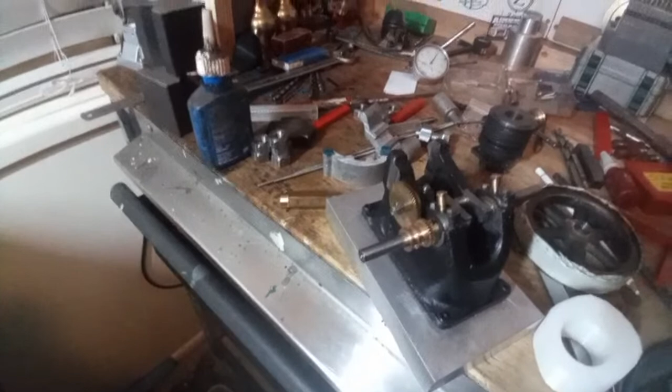Home, polished the balancing arbor for the grinder for half hour or something after I got home. I just finished messing with that.

Joe's out on the kitchen table trying to balance the grinding wheel. That way lies madness, so I leave him to it. That's what I believe anyway.

Brendan, g'day. Bill's drunk. Well, Bill's had some whiskey. I don't know if he's drunk. I don't know if he gets drunk. I've never seen him drunk.

So, had a bit of a weekend, I guess. I don't know if it was a good weekend or a bad weekend or a productive weekend or a non-productive weekend or any other sort of weekend, but we had a weekend. What have we done?

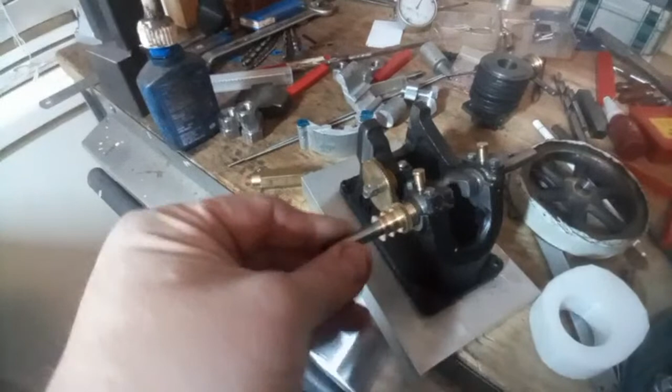This engine, we've actually swapped out the main bearings again because they developed issues. Not sure why that was. Something wasn't sitting in properly or something, and I took a fraction too much out of them, and then all of a sudden they were very loose.

So this feels pretty good here. Pretty happy with that, actually. Really feels good, and they're reasonably free. There's no play in there.

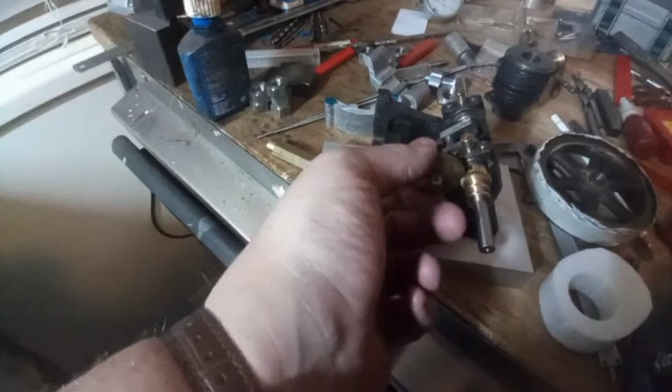It's pretty loose actually, it's not real good. So this needs a pressed in bush to fit on this pin at some point.

I also fixed this gear, which it's got an outside piece on the gear that's silver soldered on, and then three screws in it, so we've done that 120 degrees apart. Got that done.

I think also tap this set screw to hold this pin in place. It's something else I did yesterday, I think I did that. So that's where we're going with that.

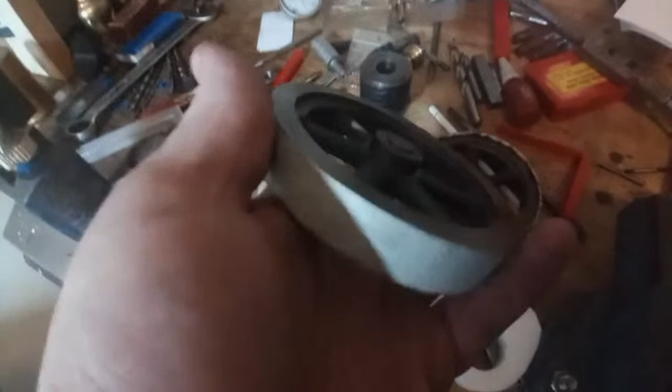I've actually bored the crankshaft out, I've bored the flywheels out. This one has had a new reasonable fit bush Loctited in properly, so that's not coming out, I don't think. And we can set that up and bore it and get it nice and fitted to the actual on here. The other one hasn't got that fitted yet, but I've only got a bit of rough old cast iron flat, or some offcuts that look honestly something like this, which I cut a bit out of and machined up.

Hey David, travelling through Croatia. Keep safe over there. Don't get mixed up in any minor wars or anything.

So this one's ready to set up properly and bore out. I'll probably face it first. It's very easy to face it square and flat. And then we'll set it up accurately and bore them to fit here.

Got a broach to put keyways in them. And then, I was at my mate John's. Oh gosh, I don't know where that went. Oh, it's over here. Here we go.

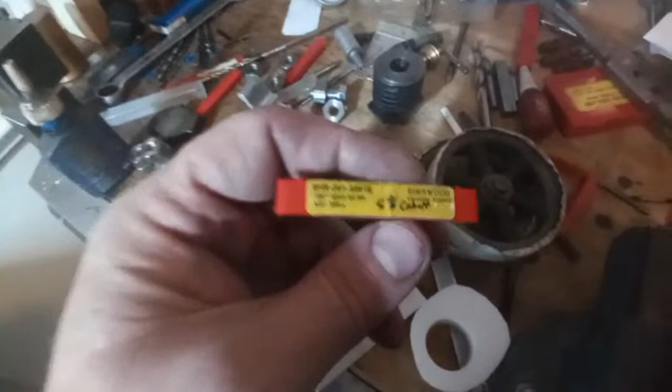It's at my mate John's on the weekend too, and he loaned me a 3/32 end mill, which isn't very big, to put keyways in here. So that'll be a fun job, I can't wait to do.

So this is looking all right. Get some flywheels on so it's balanced. It should run pretty reasonable, I think. So that's still a work in progress, of course, but we're making a little bit of inroad, I think. Here we go.

The cam's a bit of an interesting thing. I might go over here to the drawing, if we can actually get to the drawing.

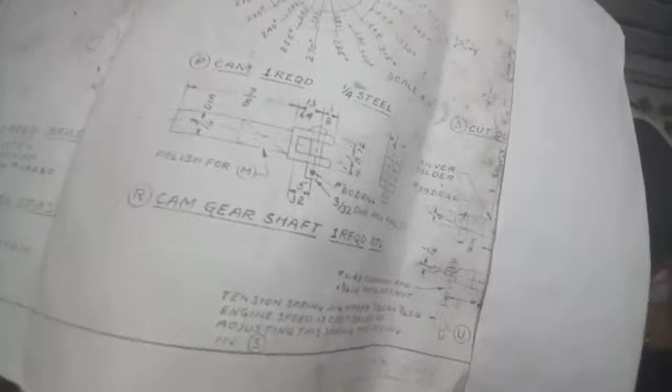Put this drawing away last night. This is the cam, right? And this is how it's laid out in 15-degree increments.

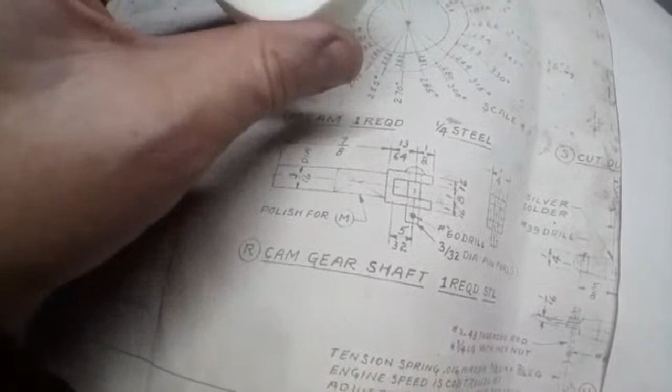Around the circumference it's 4 times or something, I think it must be about 4 to 1. I actually 3D printed it and it fits the drawing, sort of. Almost. Yeah, sort of fits the drawing.

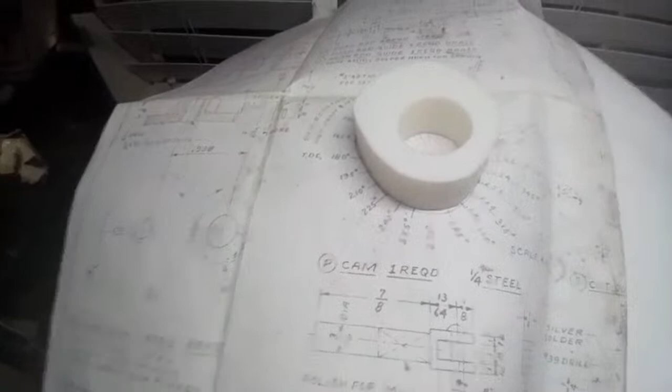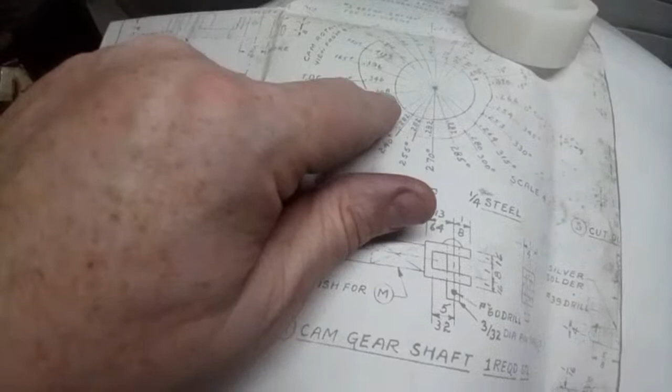So if I was going to do it manually, it's a very difficult thing, because not only is it laid out with a diameter at each increment, so at 195 degrees it's 308 thou diameter radius, and at 150 it's 412 thou radius, etc, etc, if that makes any sense.

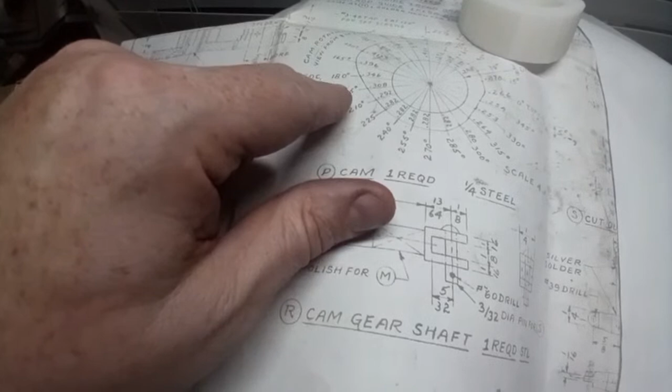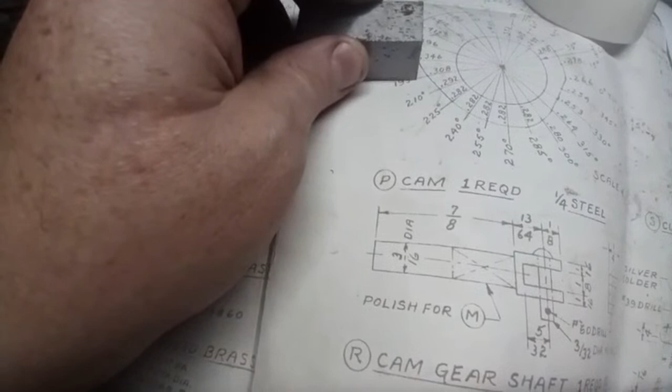You can't just set it and machine it at that and go around it and keep doing that. Because what happens - if there's a bit of material we could use, say this is the end of the cutter - if it's at 90 degrees to the centre, what you find is that it's going to cut into the side of the cam there like that. So it's not going to actually be anything like what it's supposed to look like.

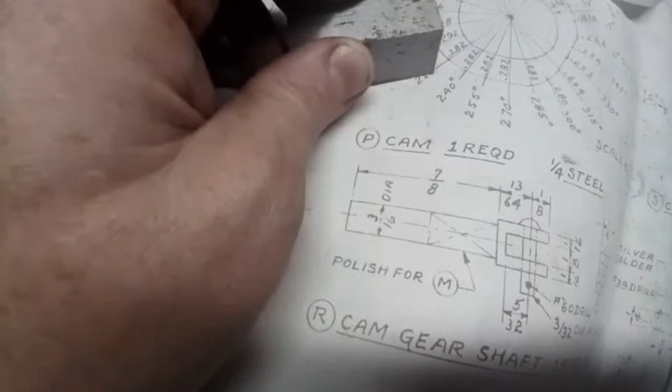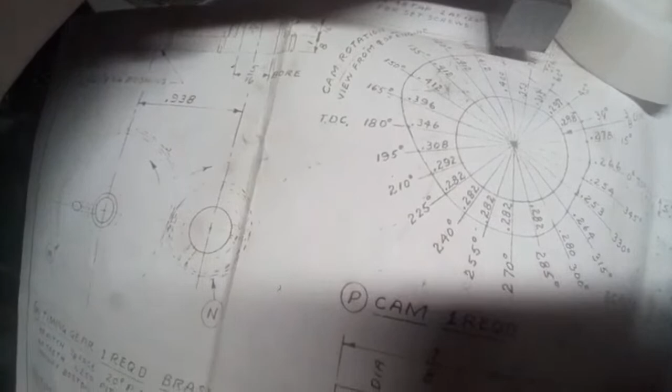If you just cut it on centre, that works too, but there's quite a bit to take off, quite a bit to file off if you do it that way. If you can imagine what's left, it only works to there because when you get round to here, it does exactly the same thing again, and you've got to do it from the other side and come round from the starting position.

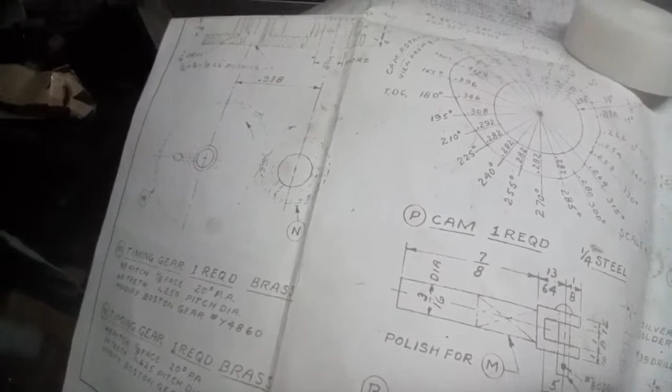Paul says it sounds like a shaper job. Yes, it does sound like a shaper job, and that's a very astute thought process. To me it sounds like a CNC machine job, but anyway, we'll see how that goes.

Anyway, there's no real easy way to do this, and the way I've set this out is just with a square - see that? Find something with a bit of contrast so you can see it. Just square corners, or the lines between the two angle points. You have a line between that point and that point, and a line between that point there and that point there.

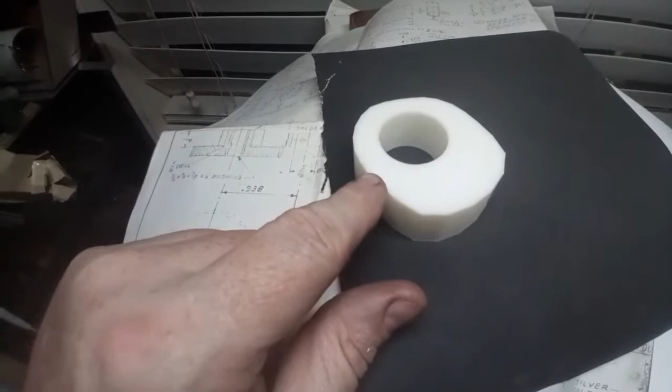So the smart way to do it, of course, is to draw it out and put a spline around it so that it's all curved, and then just run around it with an end mill.

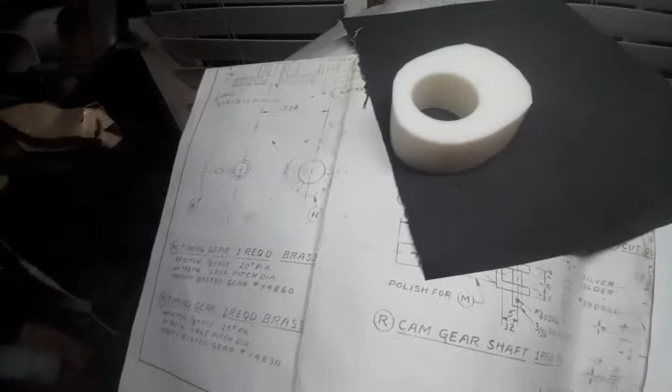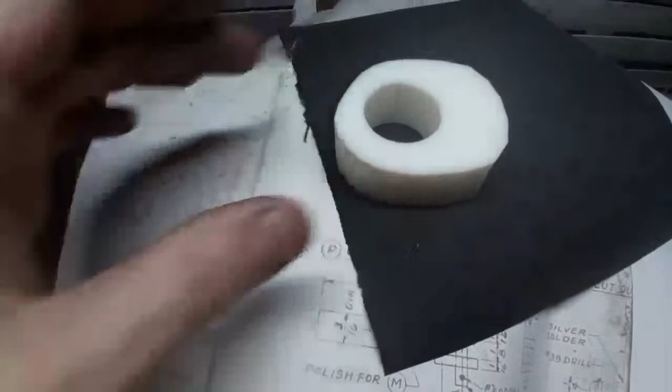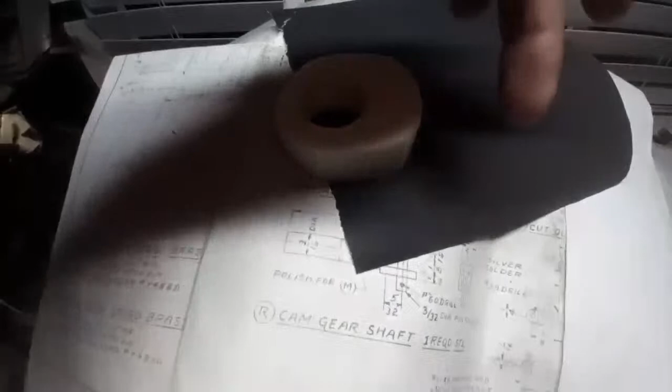Don't know anyone with a CNC grinder, that's the problem, if there's even such a thing. But it'd be very nice to have a follower, honestly. Boring bar in the mill with an offset - so you machine this around here, and offset it. You'd have a boring bar that was big enough to cover the whole lot, and then offset it to fit around here.

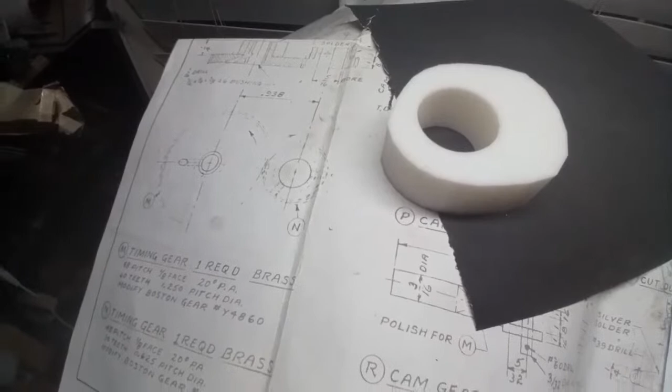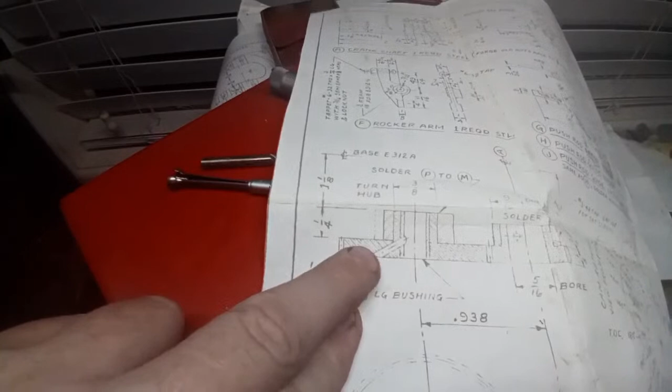Anyway, we're just going to mill it on a bit of bar, probably out of something that can be case hardened, and then case harden it and solder it on the cam. So it actually fits on the cam gear, which is here, fits over the top there, in between the gear and the body.

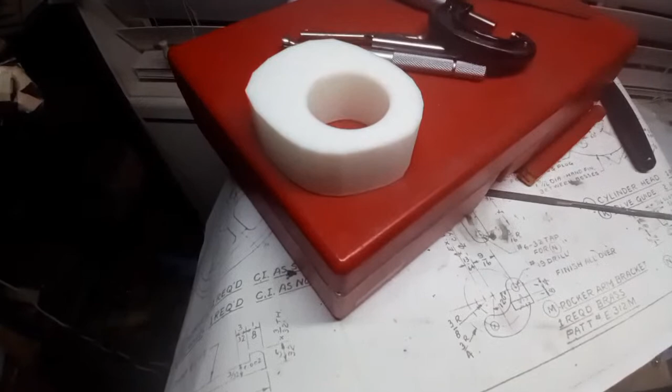This place feels a bit lived in tonight because I've had a big weekend in here. In other work,

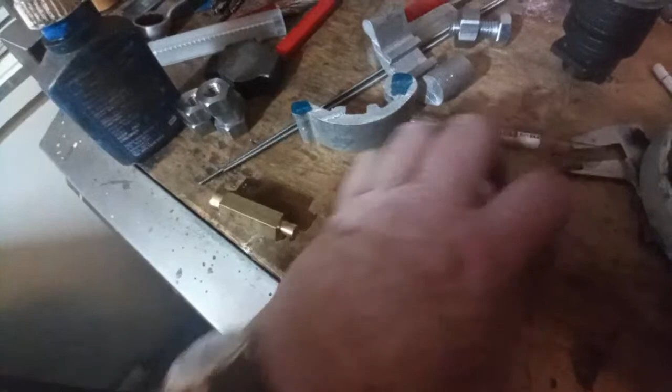these are all I managed to make, but these are 1/2 inch Whitworth BS 190, British Standard 190, 1/2 inch Whitworth full nuts, and half nuts for lock nuts.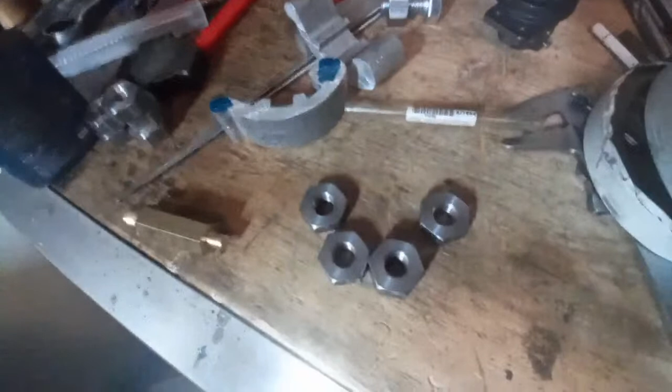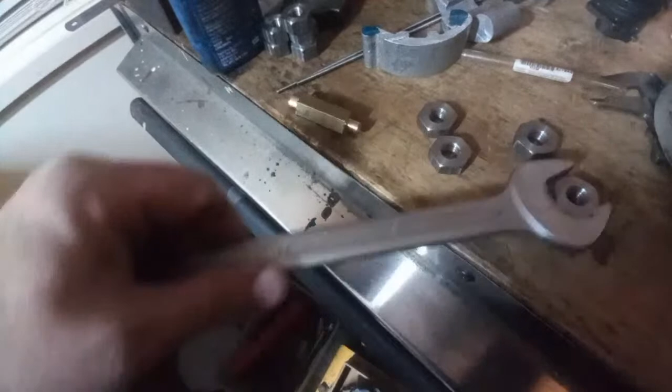So these are 4 nuts that we need for the roller ASAP, so these are going on next weekend. But it fits the spanner, which there's no point actually doing them if they don't fit the spanner. This is a 5/8 Whitworth, or 1/2 inch Whitworth spanner. Yeah, 1/2 inch Whitworth.

And if you look at it, the spanners, actually the ring spanners, the correct height for the nut, uses all the nut. And the open-ended spanner is the correct width for the lock nut or the half nut. So obviously someone's thought about that at some point. Bit exciting, interesting, I guess.

These are a bit of a pain because they're 915 to 920, I think is the tolerance on these, thousandths of an inch across the flats. There must be another one there, it's on the bolt.

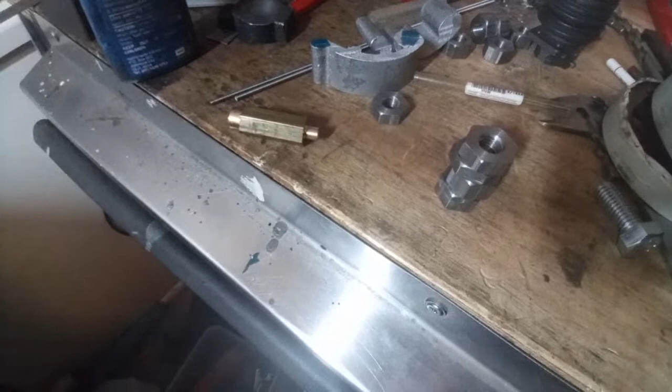So you just got to get in and make them. It's not really the end of the world, but there's some - probably will, but they're not available. What happened was that just before the Second World War, inadvertently people refer to this system here, this British standard, as being pre-war. It sort of works, but it's not really. I believe the standard was changed in the...

It was changed at the beginning of the war anyway, to save material, and all of a sudden a 1/2 inch nut was the same size as a 7/16 inch nut, which is today's standard. You see, this is the same size as a modern 1/2 inch bolt. So Whitworth's become one size smaller, and the big size is no longer available anywhere, like impossible to find.

So you've got to make them. I'll get someone to make them. Probably do them myself.

He's actually getting some sort of a production stream worked out to make these, as many as we need. These we need a lot of because there's probably 30 of them on that little Beyer Peacock engine, and there's probably another 30 of them on the roller in various places, probably more. The 7/16 ones we might need somewhere, I don't know where. 5/8 ones we need a lot of. So there we go.

If we have a look over here, I'm just going to clear some space off this bench because I've got tools here everywhere.

A set of gauge pins, which are a very useful thing if you're drilling, if you're making small bores. I think if you're boring small bores, these are about the most useful thing you could possibly own. Much better than any internal micrometer of any sort. Get a set of these up to 12mm or half inch or whatever, and then you can be pretty jolly accurate with your bore and tell exactly what size it is and how much bigger you need to go. So there's my tip for tonight.

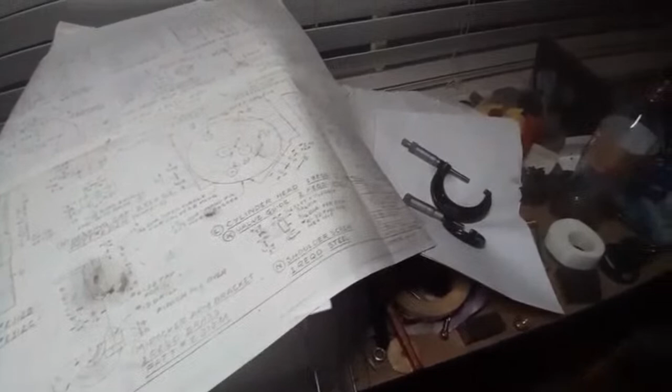Some more drawings, cylinder head and crankcase, etc. We're up to here. What was I going to show you? Yeah, I know what I was going to show you.

There we go. Machinery's Handbook, because everyone needs a copy of this. This is the 11th edition. Don't know what year it is - 1943. A reference book: Machine design and shop practice for the mechanical engineer, draftsman, toolmaker and machinist, by Jones and Oberg.

Anyway, this is courtesy Keith Fenner, and I really appreciate this because the occasional use it gets sort of makes it worth its weight in gold.

But let's look here, the chart on page 1213: nuts and bolts and machine details. It's got British Standard Whitworth, BSW hex, bolts, set screws, nuts and washers, and it's got all the diameters for the washers and bolts and nuts and everything else. Then it's got American Standard stuff, and it's got stuff like castellated nuts and square nuts and bolt heads and square bolts and all that stuff that you could not possibly do without, really.

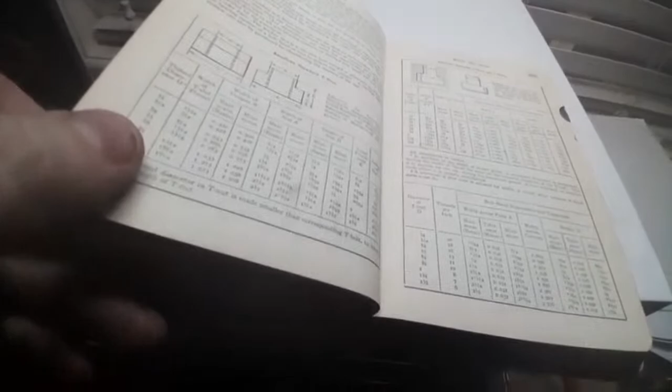Spacing of bolts for wrench clearance, which if anyone's ever done anything with English cars, they know that was not actually something that anyone ever looked at or pretended there was actually a thing. It's completely and utter fiction.

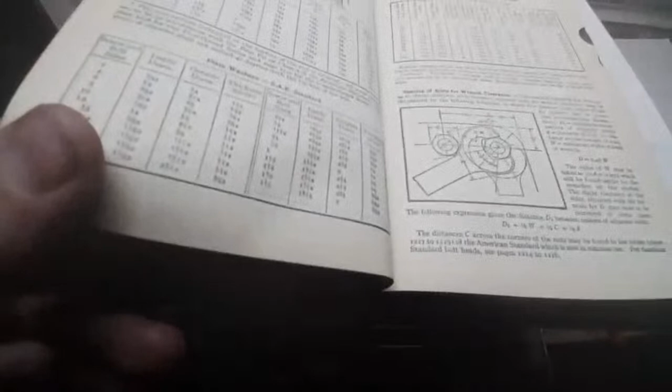But spacing for nuts on machines, castellated nuts, dome nuts, machine screws, cap screws, set screws, hand wheels and stuff going on from there, flywheels and nails and spikes and so forth. But that's all the information. So, very useful, that's the chart. If all else fails, you don't know where anything is, have a look in Machinery's Handbook, because it's probably there. You just got to find it.

So this still is pretty standard Whitworth chart. It's still the old BS 190, not the new standard, the post-war standard, so it's fairly useful. It's got a note down the bottom that says the British Standards Institution recommends that sizes marked with asterisks be dispensed with for general use. So inch and 3/8, inch and 5/8, and 11/16 Whitworth, the sizes that you probably don't see very often, because it says in the book.

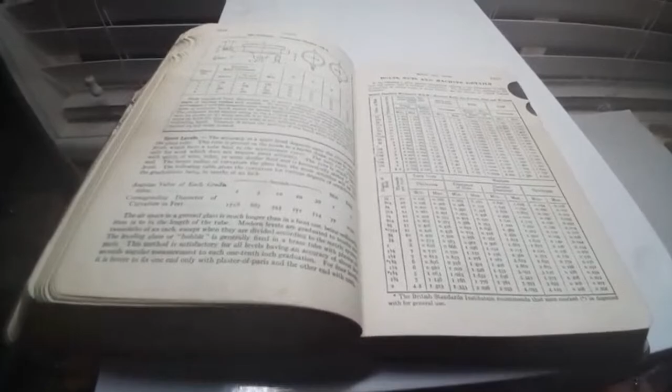But yeah, crop circles in the Machinery's Handbook, and they ignored most of that probably. So there we go, it's a treat from Machinery's Handbook, 1940 something - 1943. It's pre-wartime, is it? 1943, wartime.

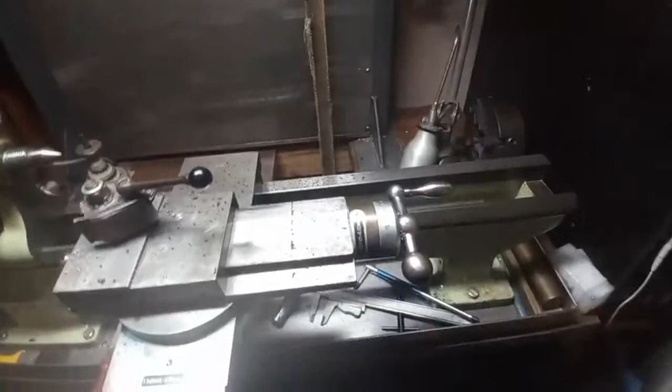Anyway, so that was done. The lathe was sort of clean for a minute last night after I sort of finished those nuts and before I started the flywheels, but that didn't last particularly long.

This place feels a bit dark in here and I apologise for that. What's everyone else up to? What other exciting things? There's a new video from Bill, saw that. There's a new one from Rustnox, which is on my list of things to see, and I meant to watch it before tonight, but I got busy when I came home with other things. Apologies. Don't know what else I saw.

I don't know if I've got much else to add. There's what I'm going to call a maintenance day, but it's really just messing around on the roller day on Saturday and Sunday this weekend. I've got the weekend off and I'm going down to spend some time fitting some bits like this and changing them over.

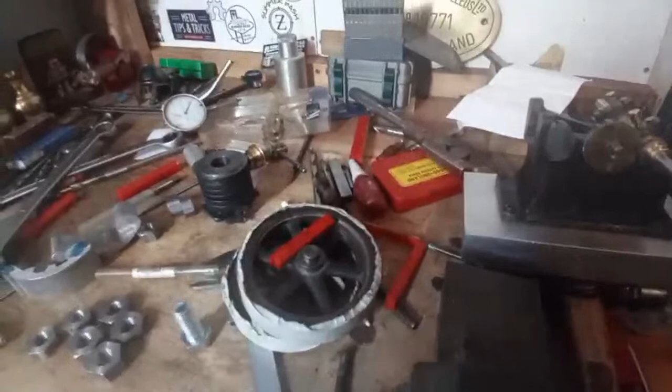Anyway, that's about it for me. I don't know if there's much else to share. I've got so many jobs here that need doing, and sitting here talking about them doesn't get them done, unfortunately. Could use a leap week - that's exactly what I need. Even a leap week's not going to make a lot of difference.

What I need is to get everything out. What I think I'm going to do is get a length of rod and a couple of lengths of bar, some bits of bar, and chop them up into short bits so I don't have to mess about repositioning them in the middle on the lathe. Put a hex on each end for about 4 inches, 5 inches, something like that, then stick them in the lathe, part them off, and make some nuts. It's one of the jobs that need to be done, and I quite enjoyed it once I got into it, but to be honest, I procrastinated it quite a lot.

These go on the gibs and tapered gibs that hold the little ends on the piston rods - so that's where they go.

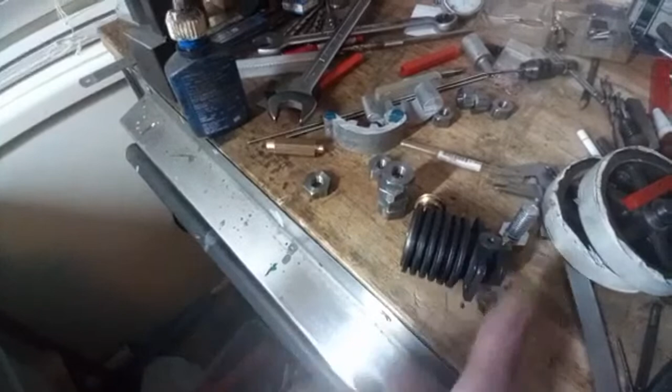Got to make a little oiler for this - this is the cylinder off the engine, so the oiler goes in here. Drip oiler - I haven't got any idea at all how to attack that, not even a little bit. So it hasn't been done.

By the sound of all that, I don't think I'd have any problems at all figuring out, without even taking any new projects on. I think I could very easily put it to use. I reckon I could spend $250,000 on the roller without any problems at all, probably a bit more, in about 2 months. It's unlikely to ever happen, but anyway, that's the reality of that one.

So, not a lot else to report, guys. Haven't watched a lot of YouTube. I've sort of spent a little bit of time on Discord, not enough. I haven't spent much time on social media at all.

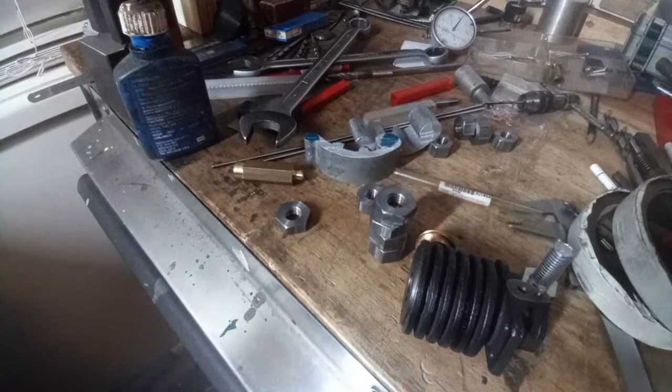I could think of some worthy recipients for quite a lot of it, Bill. Not a selfish person, but yeah, got to have it to even think about that.

Anyway, I might call it, because I don't know if there's going to be any real actual conversation of any weight or merit to impart to anyone. In fact, it's a fairly valid point that I probably don't. So we're a bit short, but there's no great set time limit on this, I don't think.

I'm going down to the roller on Friday night, Saturday, Sunday, probably Monday. I might set up a camera if I remember to take one and get it all sorted, and see if we can actually get some footage over the weekend. It might turn into a video. Not a lot of machine work footage. I'd like to get one on making some nuts when we get geared up properly to make them, because I think there's a lot of interest in these and a lot of people who are looking for them.